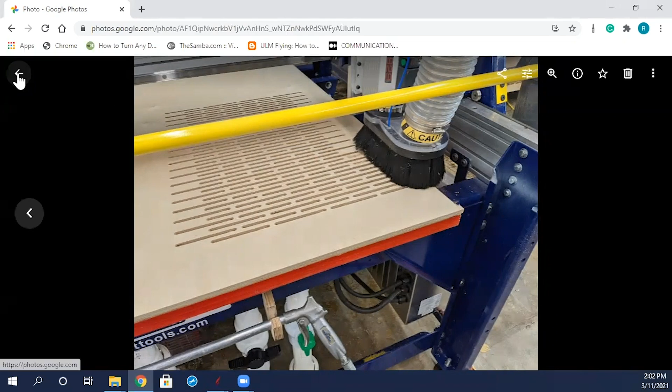I did cut a piece this morning. Here is an image of it being cut. And then just wanted to show this video here of what it is like and how flexible it really becomes. So let's get started and learn how to design and make a desk.

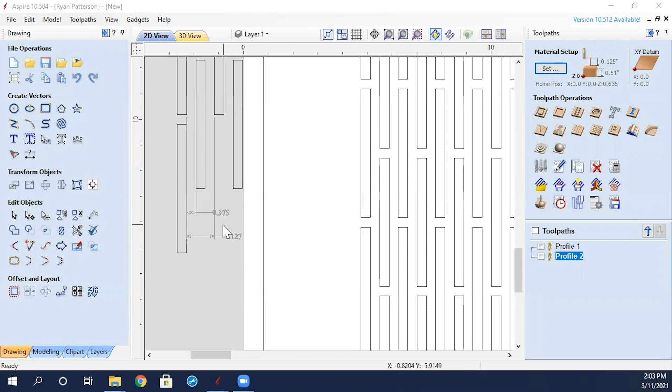So what we see on the screen now is what we are going to need to have to make this flexible. This is the cut file or the design from the video that I just showed. And we have kind of this pattern here of what I use to be able to duplicate this across the board. So the first thing that I'm going to do to start off with in designing a desk is kind of draw maybe a front view of what I want it to look like. So I'm just going to go into Aspire, but VCarve Pro works just the same way. I just happen to not have VCarve Pro installed on this computer.

So I'm going to create a new file. The material is 96 by 48 and the thickness is 1/2 inch. I have not tried this at a 3/4. I would imagine it would work almost as well, but you might have to make the slots a little bit longer and maybe a little closer together. It is a single-sided job, Z zero to the machine bed. So I'll say OK to that.

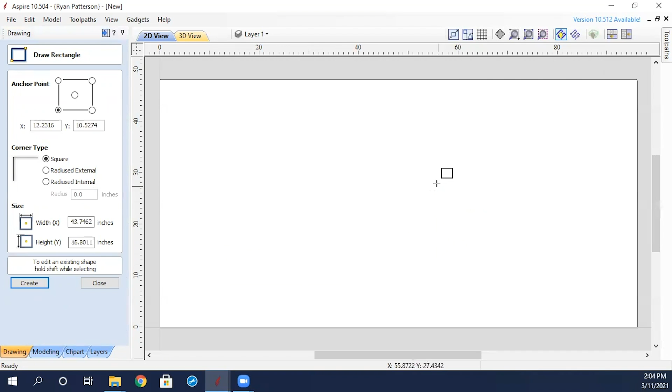So to create the profile, just going to draw out a rectangle. And probably several different ways of going about this. And I'm actually going to just use my measuring tape here to measure off about what I have. So I have 54 inches across the width of the desk. So I'm going to make that X54. And I believe the height is like 29 inches. So we will go with a rectangle of 54 by 29. So this is kind of the front view of the desk.

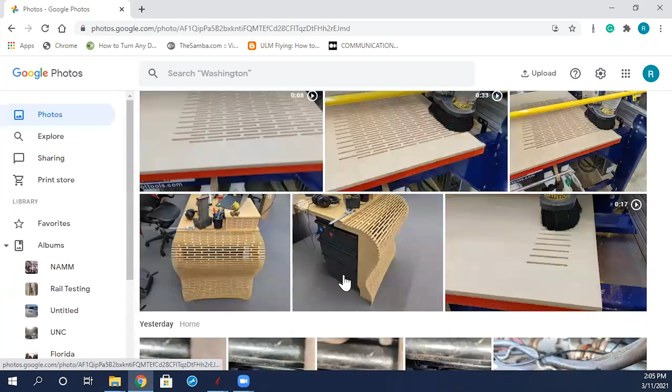What I want to be able to do is create a curved feature off on the side as we see. Get back into the photos. So creating this curved shape here, just going to use some node editing to create this pattern and shape. So clicking N for node editing. And I don't need this bottom line, so I'm going to right click and delete that span.

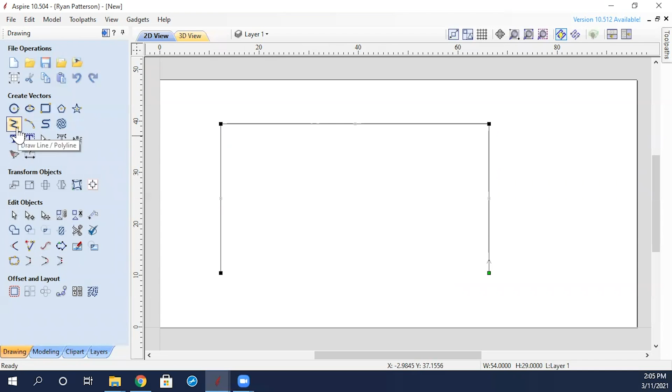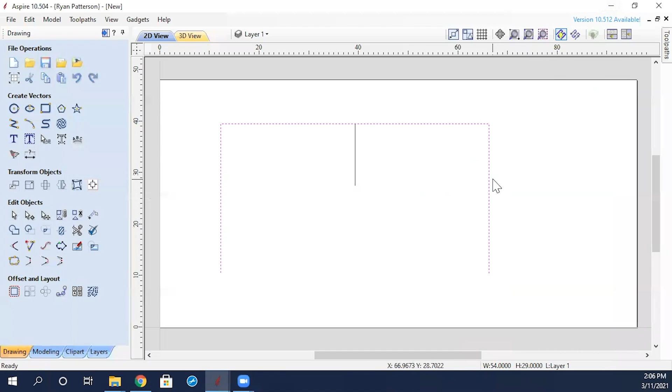So what we're doing is creating an arc or a flowing pattern like we have on the end of this desk. And this is what we are going to be reproducing. So going into node editing, and let's just start off with moving this point out, and then move another point in. We could now go and use smoothing to smooth this out. And we want to have this to be a kind of a perfect transition from flat to around.

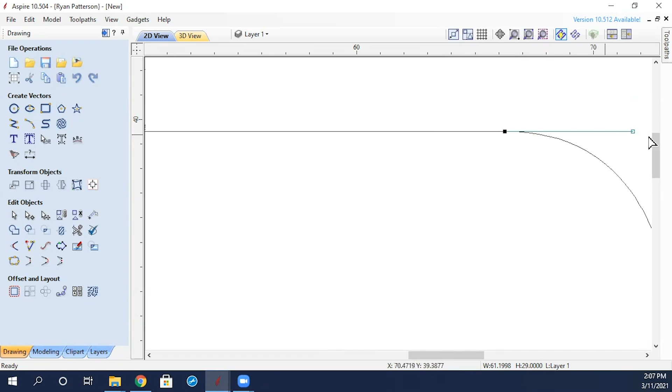So what we are going to use is the alignment features within node editing. Just going to bring this up so we can see what's going to happen. This line we need to have to be perfectly parallel with our horizontal line. And I've just discovered a new feature that I have not really paid too much attention to. It has the smart snapping to where it is automatically snapping to that horizontal line. So that's actually very useful.

What we once had to do was select one, hold the shift key to select the other. And if you want to have those aligned in the Y direction, just type in the letter Y, moves that. But as you see, it moved the wrong one. And that is because I selected this one first, then this one. Doing it in the opposite order is going to shift that down.

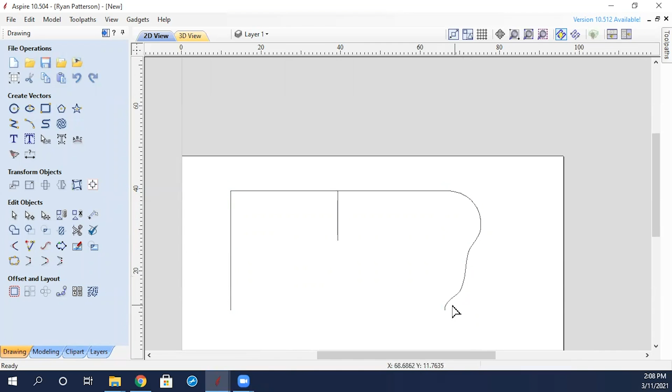So really just kind of creating some sort of a flowing pattern. I think I need maybe another node. A shape similar to that. So again, this is the midpoint. I'm just going to go ahead and trim right now just to know that we only have half of that.

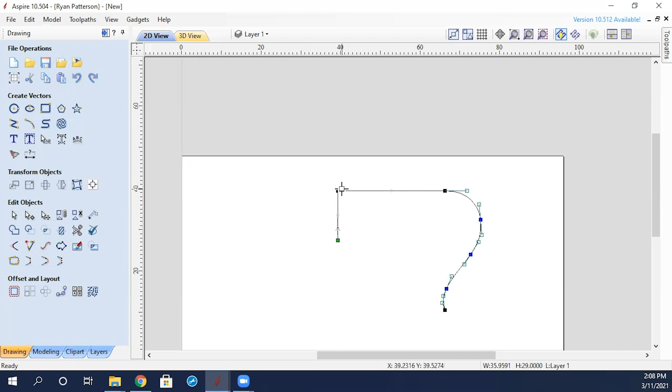Now, one thing that happens when you do a trim, I really don't want this midpoint line to be joined, but a trim automatically joined that. So just going to right click on that node and say cut vector. That now separates those two.

Now using the offset tool, I'm going to offset outward maybe half of an inch, but let's mirror that first. So selecting the object, using the mirror function, selecting our other line here, and going to flip about the line. No longer need that midpoint, and I'm going to select both objects.

It's kind of strange that a trim automatically joins, but a mirror and other functions don't. But anyway, we'll go ahead and select both of those, and typing the letter J or the join icon and selecting to join. We now have the basic shape of what this desk is going to have.

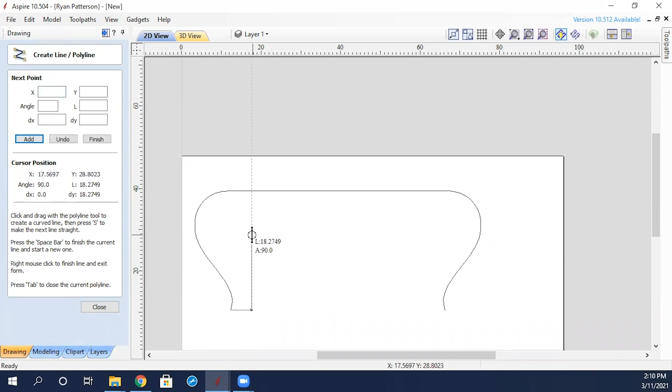The way I created this was just overlapped the material. So it is 1/2 inch plywood. The desk part itself is a total of 1 inch thick because this is kind of overlapped on one another. I also created some ends on it to attach it to.

Again, I should have really paid attention to what that line was. That's okay. This is a lot of just kind of design on the fly here. So you're seeing my whole design process, failures and all. So a lot of times when you're designing a part similar to this, there is a lot of just going to do it, I didn't like that, undo it, recreate it, and you might do something and realize there's a better way of doing it. So this is what I just discovered in that process.

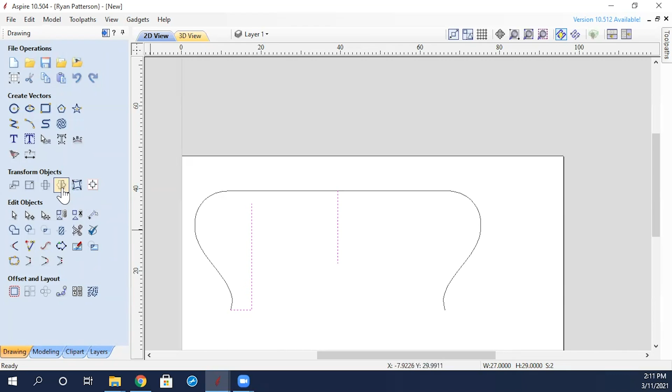So again, I want to be able to duplicate this onto the right side now. So again, I selected what I want to mirror first, doing the mirror and flip about line, making sure I have that create copy selected. And then I will connect that together with a line.

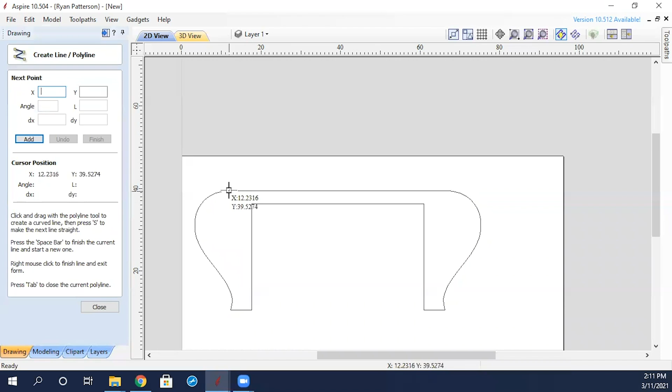And just a way to verify that everything is going to fit right. And then also we're going to measure along these arcs to see what we really need it to be. So I'm just going to offset outward to the right. I know it's to the right because here is the start point, looking down the line to the right side. I'm going to offset that out to be 0.5.

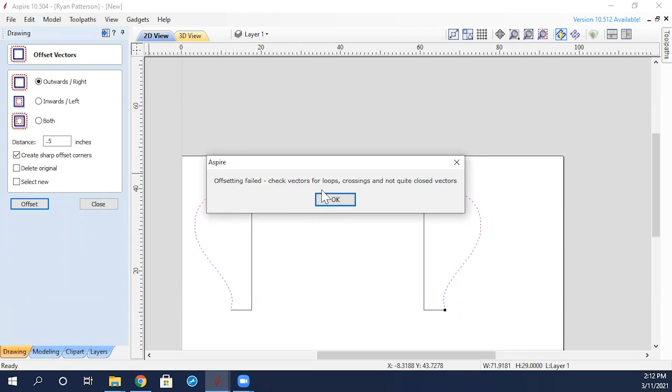Right, so that is a good find. Let's figure out what might be going on there. Maybe somebody else will help me out. So I'm going to go into node editing and just kind of look around to see what might be the holdup that it did not like. I'm not quite sure. So try it one more time. It doesn't work the first time, it's certainly going to work the second time, right? Well, no. But that is just fine.

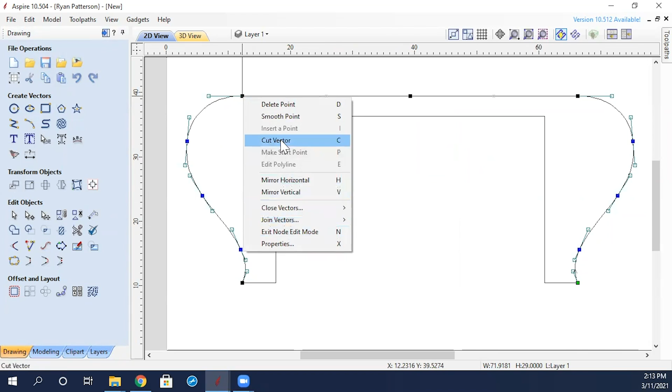I'm going to separate it. We have to separate this anyway. So I'm going to node edit and separate it right there at that point by cutting. And see if that allows us to offset. And it does. So that is good. That is the one side.

And this side, going to be there. I really can't remember what I did to offset it. Now I see what I did. So this one is actually offset to the inside, or, again, it's still to the right because there is my start point.

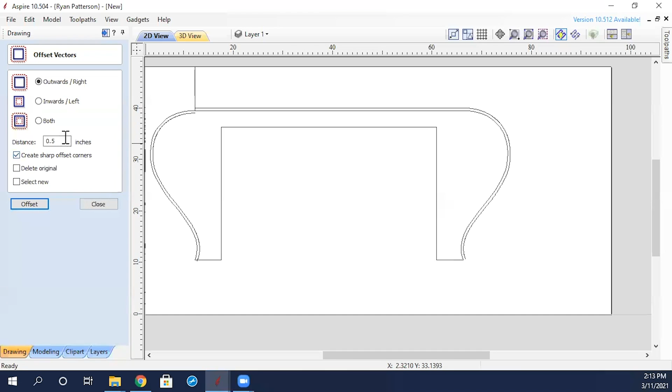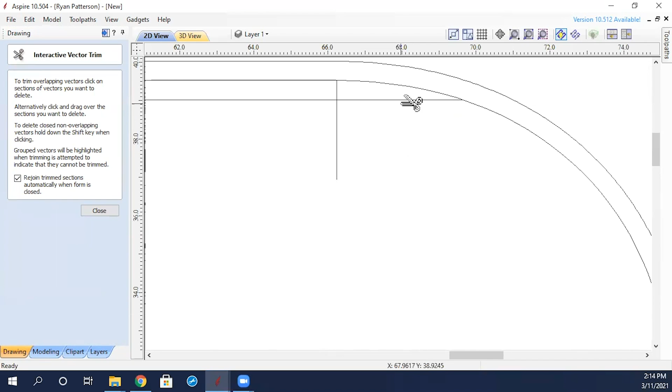And just going to continue that line straight across to the opposite side. And again, just using the endpoint, snap down, and we were really going to get into these scissors later. So that is kind of the basic shape of the desk.

And now our goal is to be able to measure the linear distance from the endpoint of this line to the point that we have down here. And we also need to know the distance from the point right around in here to the bottom point here so that we could get the stop point of the pattern that allows it to flex.

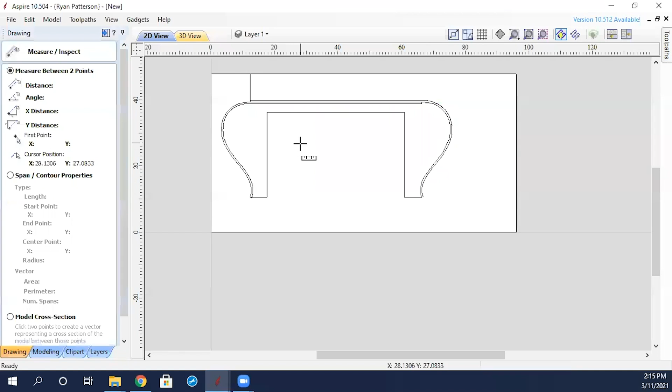If you are not familiar, there is a way to measure a distance. So I'm just going to measure from one to the other, and that's 54 inches there. And should have had some paper. So yes, sometimes math is involved. So we're going to go 54 inches.

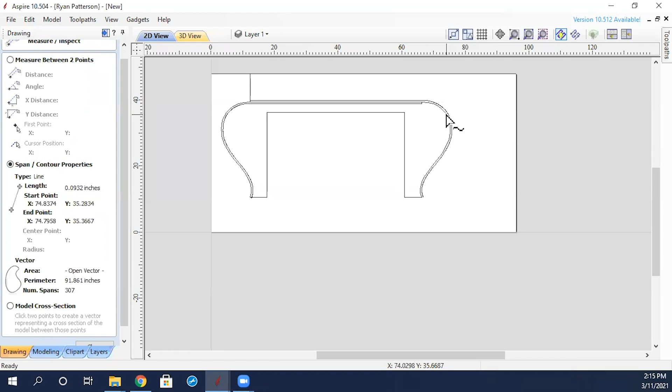Now, the other thing that we need to do is measure along these arcs. But doing this as a straight line doesn't quite work because we're not getting the arc length. There is another option here that is able to measure along a contour. So selecting the contour shape that we want, and basically we're going to just need to start adding up these numbers. So there's another 12.5.

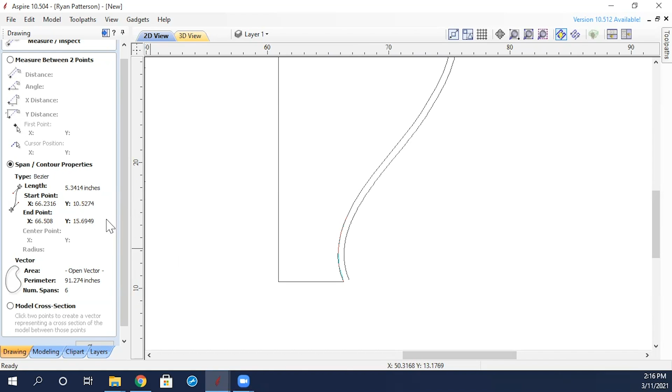Another 9, and I'm just going to do some rounding. It doesn't have to be 100% perfect here. 10 inches. And you'll see that it is kind of turning red on that line. It's really kind of hard to see, but it's a red teal colored line that's going through here. And that final one is 5. 25, 27, 38 inches total that we have from top to the bottom.

So now with that all in mind, we're ready to start laying out our flat sheet goods to be able to create this. So I'm just going to select this, move it up out of the way, and going to go with a rectangle. And the total depth of my desk is, well, it's 54 wide, and we're 30 inches deep. And then that rectangle is representing the top side of the desk.

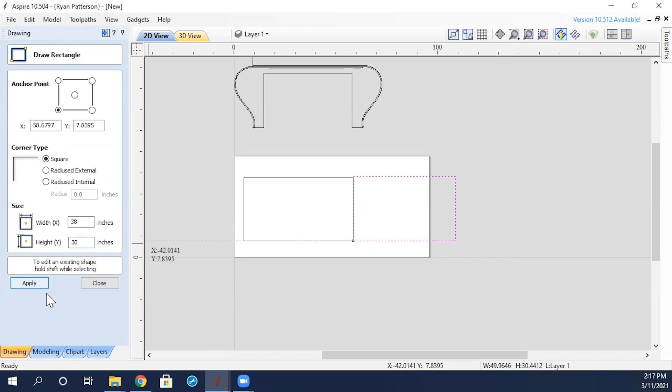The leg part is going to be 38, and then the height, which is really the depth, is going to be 30. And I really hope that the layout with all of that added together is still less than 96 inches, which is good. So now what we need to do on this section of the blank, we need to create a pattern of kerfs or through cuts that will allow this to flex. And again, coming back to that video of what we want to see here, and this is what we're going to be creating.

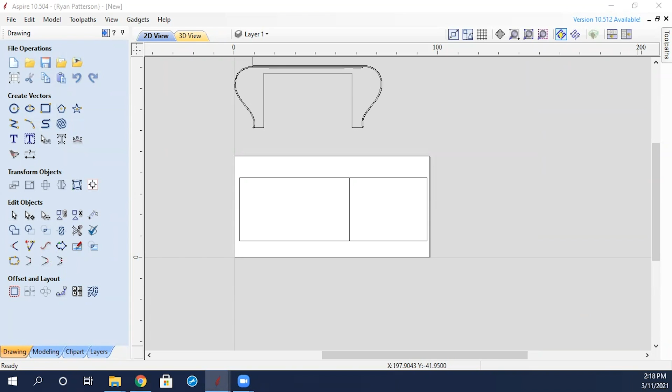All right, so I think I may have just clicked a button that prevented me from sharing my screen. So hopefully that is not the case and everybody is still here with us. Yeah. All right.

So now to create this pattern, I have this pattern here, and this is what we're going to be creating. I started off with creating just a small pattern by manually creating it, getting some measurements, and then we're going to use the array copy to be able to duplicate this pattern much more easily.

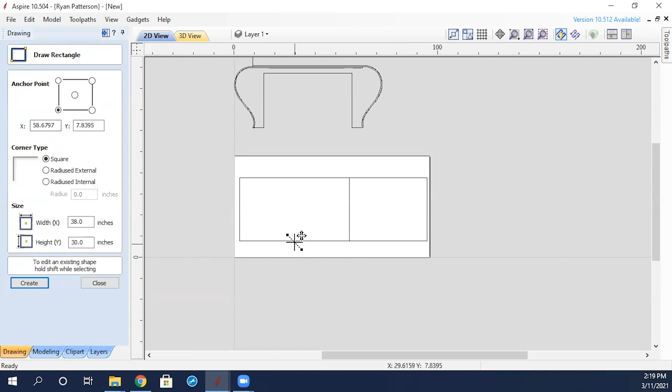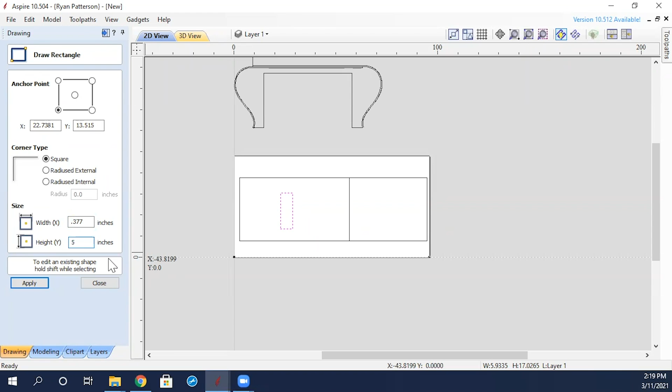So starting off with a rectangle, and I am going to be cutting this out with a 3/8 wide bit. So the width of this rectangle needs to be at least 3/8 of an inch. And I did create that to be 0.377. And then the height in the Y direction is, I made it 5 inches. Now you could explore different settings and different variations of that to see the pattern. And we'll look a little bit at distorting later in the video to show how we could possibly distort. We'll see how it works.

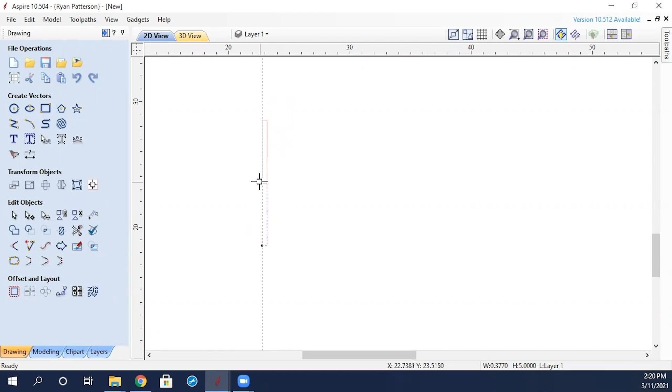So with that one rectangle done, I'm going to manually create this pattern. So I'm using the snaps to move or copy. I held the control key down as I snapped from this lower left corner to the upper left. That made a duplicate copy because I had the control key held down. Then I'm going to choose to transform, move that object, and I'm going to move it in the Y direction by 3/8 of an inch. And to do that, I'm just going to use the relative distance and move it up 3/8 of an inch.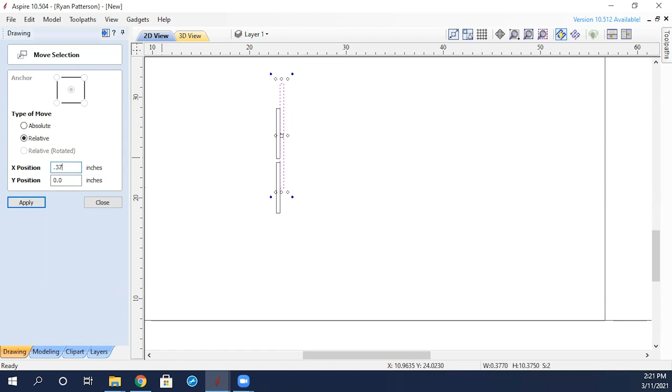Now we need to create basically the same pattern. So I'm going to hold the control down, but midpoint to midpoint here. And going to move it in the X direction by 3/8 of an inch. So I did that, but that's not quite right. And I'm going to double check that because the midpoint of this gap here should be at the midpoint of that line. And it really is not. So we did have that to be.

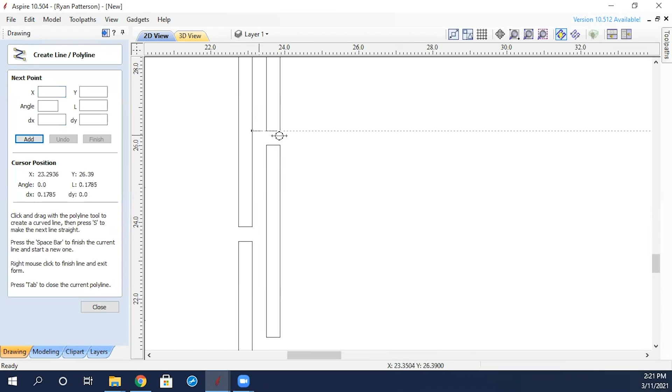So this gap is 3/8 of an inch. I really need to move and shift these two up by half of that gap, which is going to be 3/16, which is 0.1875. Now, if you did not know it's 0.1875, you could go 3/16 and then it equals, and that equates that for you.

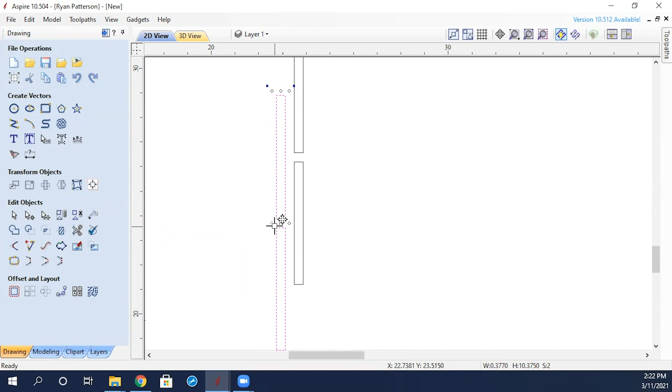I should not have moved it in the X, should have done it in the Y. So now that is kind of the basic pattern that we want to be able to reproduce and copy. So we're just going to create the same thing of this one, just to kind of complete a full section of this pattern.

And I do things different every time I do something. Again, I forgot to hold the control down. That's selected, going to shift over. Now, once you really start getting into it and knowing this, these steps here aren't really fully necessary. This is just helping me make math a little bit easier.

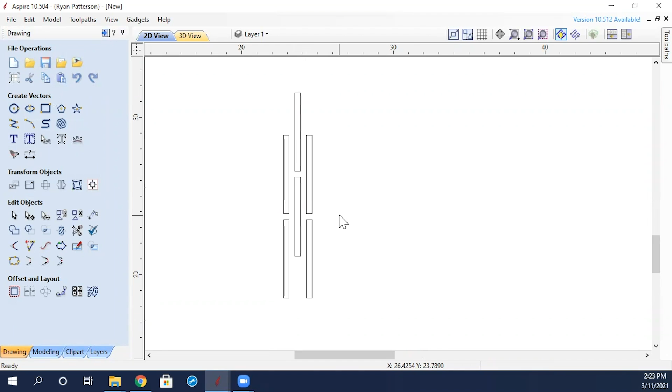So with those patterns created, just going to use the dimensioning tool to kind of record the gap between what we have here, between this point and this point. And we already know the others, which is 0.377 in the width and then 3/8 in the height there.

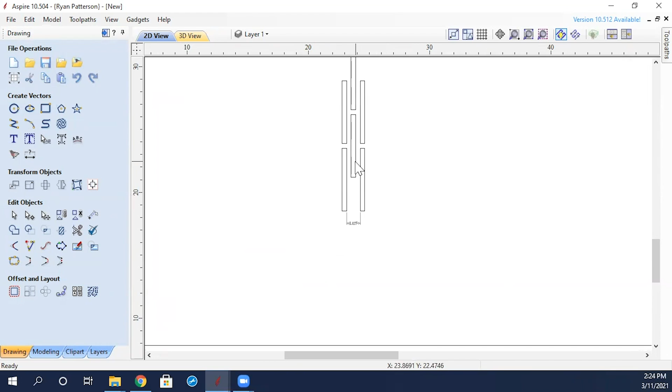So the reason for all of that work was just to get that number of 1.127, and also to get this spacing pretty much kind of right. So we're going to just bring that over here. Not worried about exact placement yet, because we'll use our alignment tools when we completely fill this out.

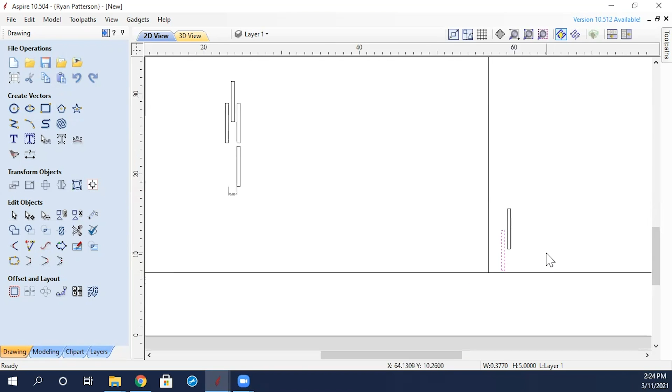But I'm going to be able to use our array copy. And I'm going to do it twice, one for this one and then once for this pattern.

Selecting that one first, use our array copy. How many of them do we want in the Y direction? I'm going to say maybe 6 of them are going to fit in the Y, and maybe 20 in the X. And we can go copy.

No, we definitely need more than that in the X. So let's bump that up to... oh, we don't. So bring that back down to 20. The gap is not 0.377. We want that gap to be that 1.127.

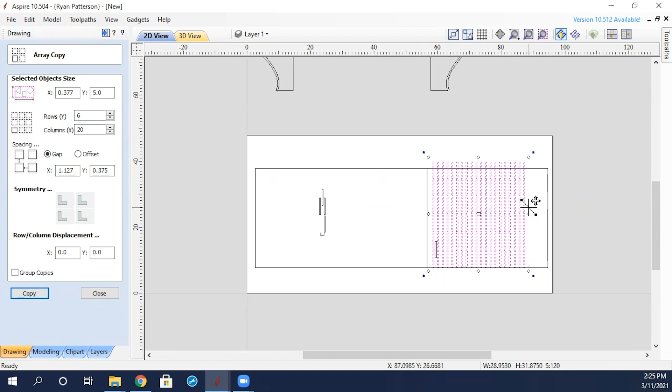Could bring it down a little bit more, but I do have on the bottom, I do have a flat spot down there. So let's just bring that up another, add another 3 more to it.

Going to run the same on this pattern right here. I am going to add 1.

I need to create and move this pattern to the bottom side to get it to be offset on both sides, with that selected.

And again, this is kind of me doing this on the fly. If I were to do multiples of it, I would probably rethink how I'm doing this and do it completely different than I just did it, 20 minutes ago when I cut that.

So I'm going to move this down by 3/8 of an inch. I'm still in relative mode, so I'm going to move that to a minus 0.375 and then create that.

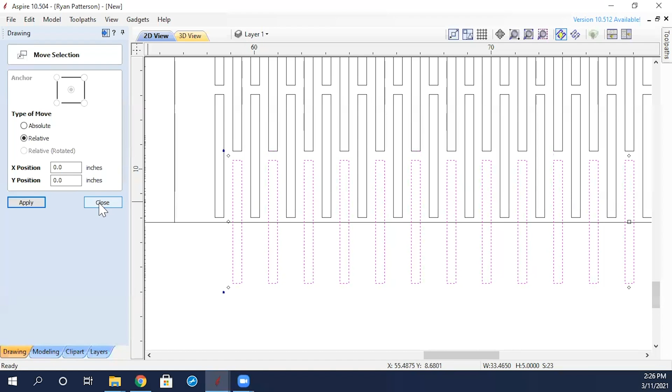Don't need any of that. And I'm going to go node edit. I still want to have this line over there, but I don't want this top and bottom line span. Or maybe I did. I can always put it back.

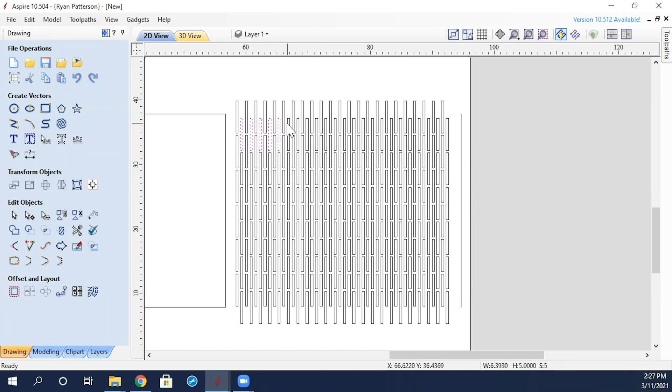All of these individual points right here, we need to extend those out so we could trim those off. So going node edit, and this is a nice feature of the newer version of Aspire and VCarve Pro that allows node editing of multiple items.

And we're going to see another fun feature of the new VCarve, if you haven't figured it out yet. It is the feature of trimming. Okay, I'm putting those lines back that I've already deleted.

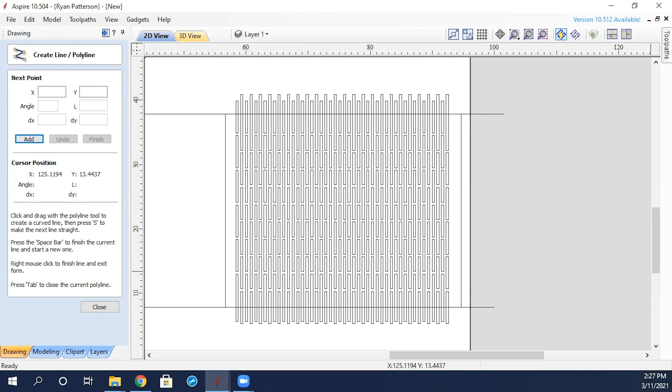And the scissor tool that we need to trim all of this off there. And the new feature, if you hold down and just move your mouse across there, they all get trimmed off. There we go. So again, deleting that line.

What we need to be able to create is a cutting pattern that is going to cut around the outside of all of these. And this is where your eyes kind of start getting a little bit lost and confused, at least for me. So we really want to have a line like this, and then we need a connecting line every other, or have an opening every other spot there.

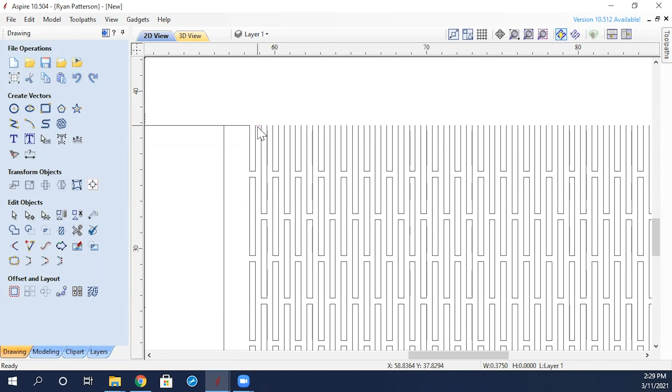I am going to not have this as a square, even though the sample piece that I cut, I set as a square. I want to have this as an arc, a little bit smoother transition. I didn't even do that with the desk. I thought I did. But anyway, going to go node edit and convert that to an arc and bring that up to the top. I don't want to have that joined just yet because I want to be able to duplicate this down the length of what we have here to be able to finish connecting those dots.

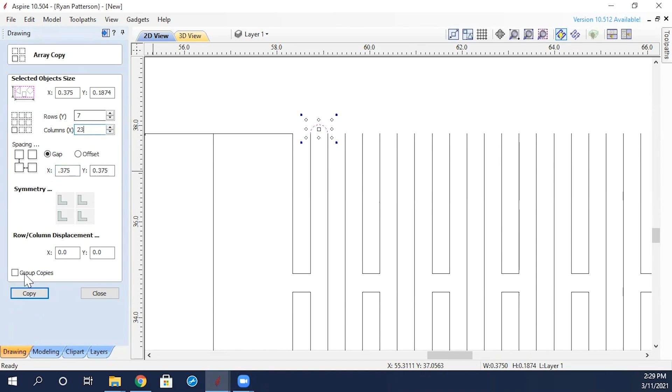With that selected, running the array copy, the gap that we want to have is going to be 3/8 of an inch. It might be .377, but 3/8 of an inch. And let's just do a copy. Yep, it's 3/8 of an inch. That's good. I don't want any in the Y, so the magical keystrokes, Control Z, just undoes what we did.

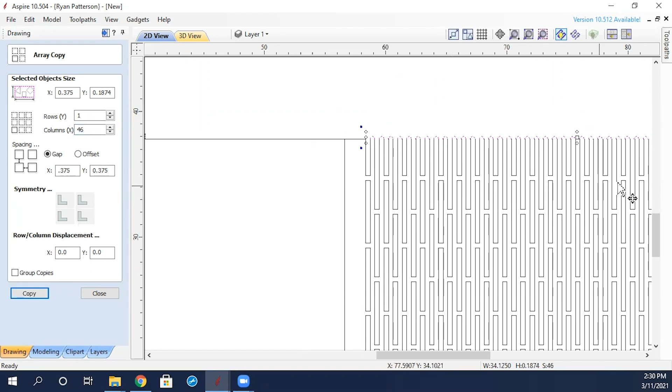So I'm going to reset the Y down to only one of them in the Y direction. I'm going to double the X. And it is not, you see, we have kind of an accumulation of error that happened there. So it is that 0.377 that we needed. So again, Control Z, 0.377. That's what I wanted.

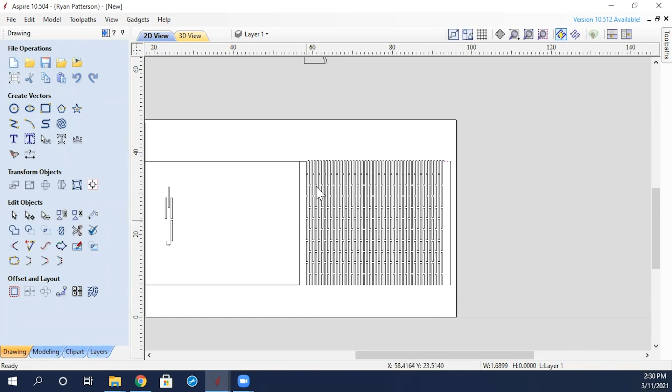And just make that final connection right there. Now, there's a couple ways that we could create the opposite side here. We could mirror what we created on the top, or just do a duplication of what we just did on the top side. I don't think either is right or wrong. It just all depends on what your mind is up to that day. So I am going to do it the exact same way.

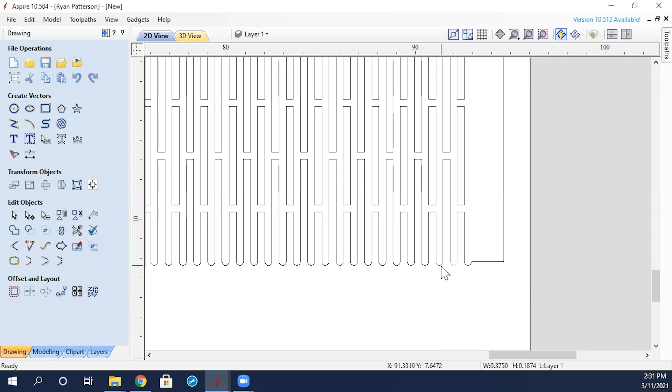All right, now with that all complete, we are quite opened up. So even though everything looks like it's closed and good shapes, we are definitely not. We are completely open. We need to trim some things away. Let's get rid of this line right there. That may have automatically joined some. It did not.

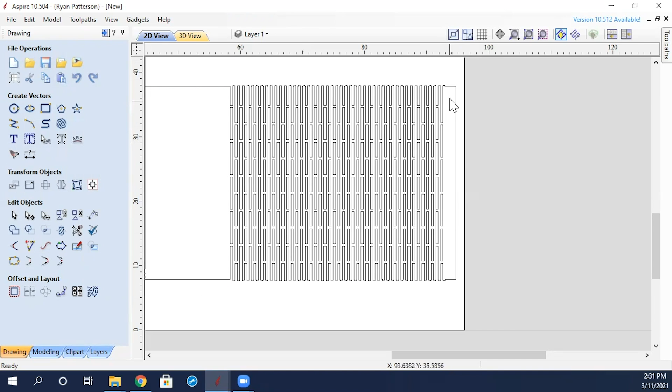So let's go ahead and do just, let's go ahead and Control A, does a select all. We don't have a lot on screen, but that is okay. It's going to unselect what we do not want to have joined. Clicking join with the letter J. And now we should have one continuous outline that it is going to kind of cut all the way around there, and then we'll cut in between all of those vectors there.

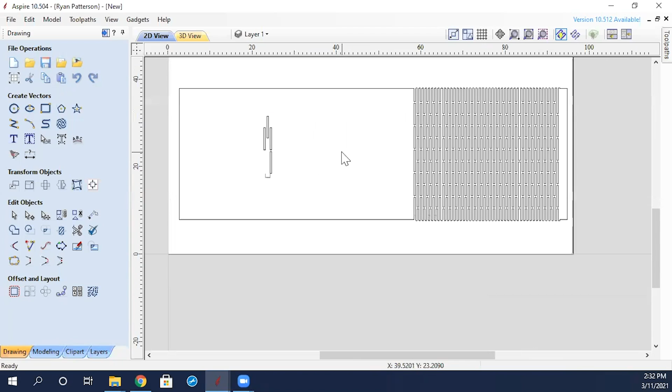So once this is created, we're ready to, we just need another sheet for the kind of the profile or the mold of the design. I want to have this basic shape down here. So I'm going to clean this up just a little bit.

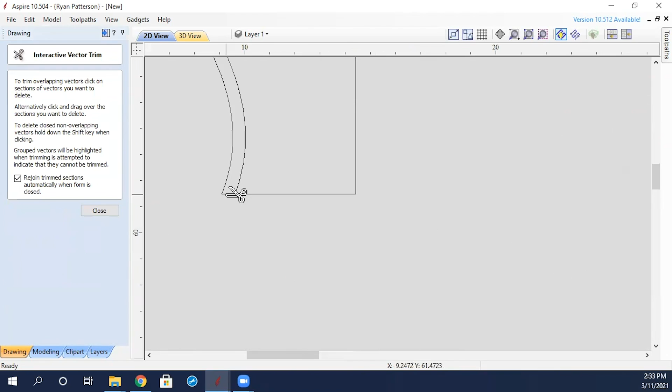This side, it really doesn't matter. We're going to get up around the top. And just trimming away the parts that I know I do not want. All right, so that is going to be it, and it did not automatically join that. So make sure that we always stay joined and not get too far ahead onto another product section when we don't have it joined.

All right, so yes, we have this little notch here, but that is going to fit just perfectly because remember, we are going to put this side down on top of that. The bendy side is going to flex and bend around here, and then we'll put another duplicate exact copy of what we have here, layer it on top, and come around the bottom side. Again, let's just see if I have the photo still up. So you can see how it's doubled up and as it goes across there.

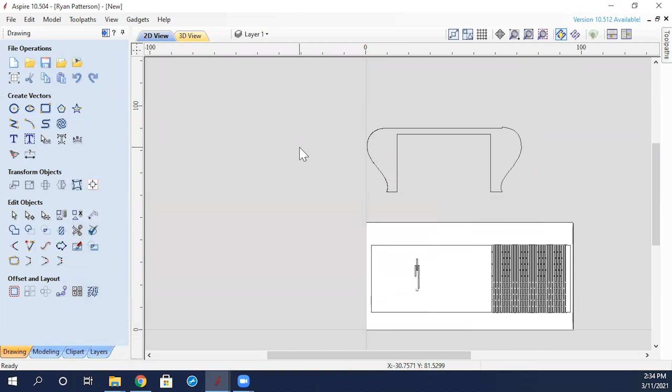So we're ready to really lay this out on our material now. A couple ways that we could do this. I could create a nesting of this, which I might do, but I'm not going to completely fully nest because we'll try it both ways. I'm not certain if the nesting will automatically do very well with this part here. I think the nesting is going to tell us that we have need a total of 4 sheets, where I think we could get it 3. But we'll see what happens.

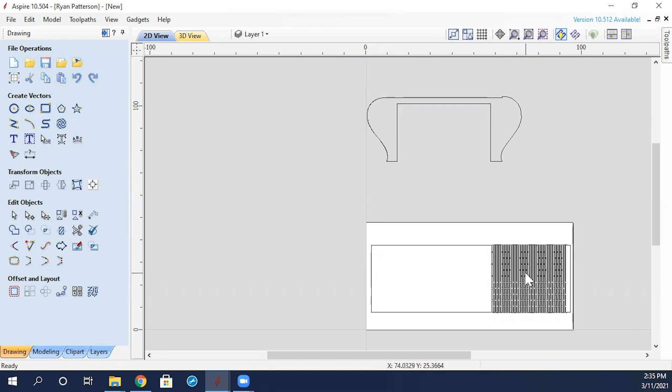All right, so I'm going to do a sweep select of everything that I want to have nested. Before I do that, we really do have to select them individually because I need to say that I want 2 copies of each of these.

Apply. So that is giving us that number 2 on that one, and then the number 2 there, that's saying that we want 2 copies of each of those, so I'm not drawing them twice. So now we can see that I'm going to get 2 of the supports and 2 of the desk bendy side of it. So with the quantities selected, I am going to come back up here to start filling in from top to bottom. The tool diameter is going to be 3/8 of an inch.

That's what I'm going to choose to cut this out with. I do want to have at least 1/8 of an inch in between each part. After the 3/8 goes through, it's going to have at least 1/8 of an inch material to remove off, so that will give us a total kerf cut of a 1/2 inch total between each part. The border gap, let's bring that down to 1/8 or 1/4 of an inch.

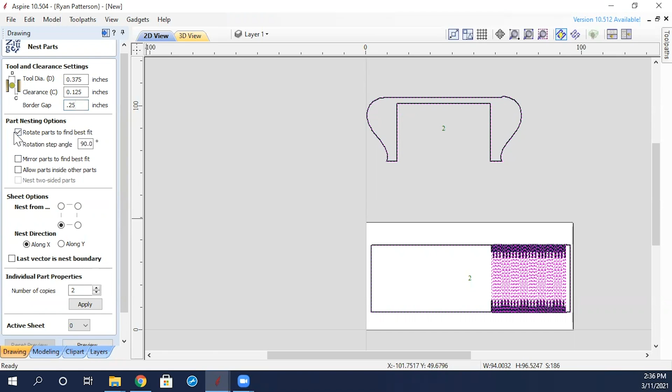That is how close are these parts going to allow to be nested to the edge of the sheet. Do I want to allow rotation? Yes, we want to allow rotation. There's no point in saying any greater than 90 degrees. Really just say 180, because there's no way that's going to fit any other way but 90 or 180.

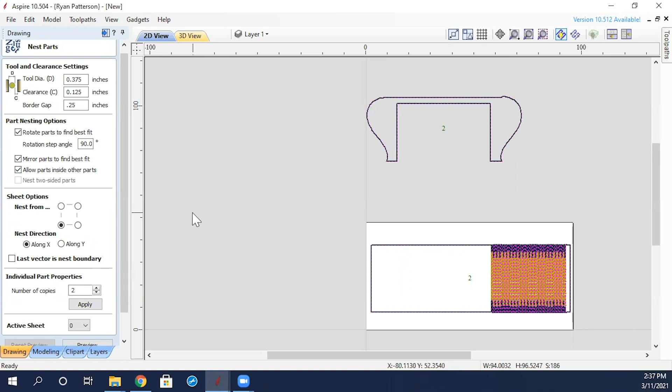Mirror parts to find best fit. Now, really, again, doesn't matter since this is already a mirrored part, but why not? Allow parts to fit inside of one another - we do not want that, because there's just no part big enough to fit inside of any of those small parts.

I don't ever really worry about any of this. The last vector is nest boundary, that's if you have like a big set of material and you want to nest all these parts within a boundary, but our boundary is the material set. So we are good to go to preview.

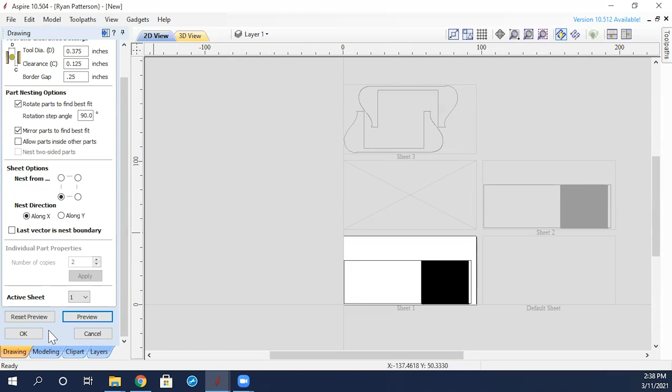Oh, well, it did a good job. I did not know it was going to nest those as well as it did. I thought it was going to try to put each one on its own sheet. So not too bad. I am going to come up on sheet number 3 and modify the layout just a little bit. But before we do that, we'll go ahead and say okay and accept this nesting.

And to view each of the sheets, we have sheet 1, sheet 2, and sheet 3. I really should have just told it to do one of these parts, because I would have just cut that file twice. I'm not even going to bother toolpathing sheet number 2.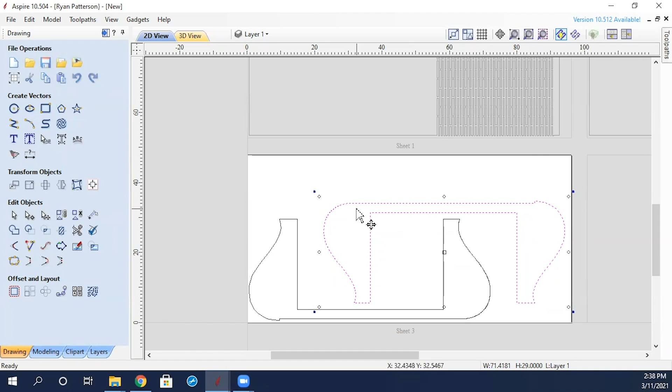So I'm just going to rearrange this a little bit by bringing this down. The only reason why I'm doing that is to have a more usable leftover waste piece to use for another project, a little bit more material usage that way rather than eating up - well, you could do whatever you'd like to do with that. I just feel that it fits better.

Anyway, we are ready to create the toolpathing for this. And since we're on sheet number 3, let's just go ahead and set the toolpathing for these parts here. I'll show you the video where there's a little bit of a blooper in it - we'll see that at the end, a little bit of a fail on my part, and it was all about hold down and how they were cutting when I cut that sample.

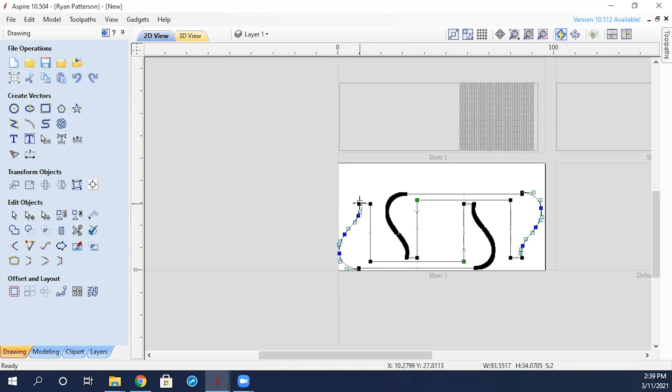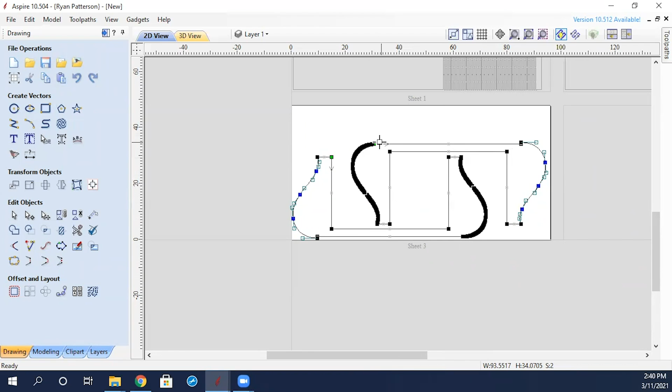So I'm just going to come in here and replace the start points. So that is right clicking and selecting to make start point, or hitting the letter P for the point to start. We are going to cut in a conventional direction, so that means it's going to start right here and work its way from right to left around this part in the conventional direction and finish up here. So with that start points selected, I want to select them in the order that I want to have them cut.

So I don't want to cut this one first, just because of the material hold down and the vacuum and everything. If you've seen our video on nesting and optimizing the strategies of cutting, that's kind of what I did there. We have that video out there already.

So with that selected, and I did select those in the order that I want to cut, but that doesn't mean that's just what's going to happen. We have to set and tell it that that's how we want to have it cut. It's probably how I have mine set by default, but we will view that setting. So we have the start depth to be 0, which is typically 0.

Settings that you kind of have to change. There's a lot of arguments I see on forums: I just changed that, the start depth. Well, the start depth has very specific uses, but the only use for a start depth is if you've already removed material. People like to try to control V-carving with that. That's not what you do. That's not how to control the depth of a V-carving.

So we are going to cut 1/2 inch deep, and actually a little bit more than 1/2 inch deep, the 10 thousandths, which is enough to go through the material and down into the spoil board. In fact, when I was cutting our sample piece that I just cut, it did a couple slots, and I saw that I wasn't cutting deep enough. And I'll explain that when we watch the video and how I got around fixing that.

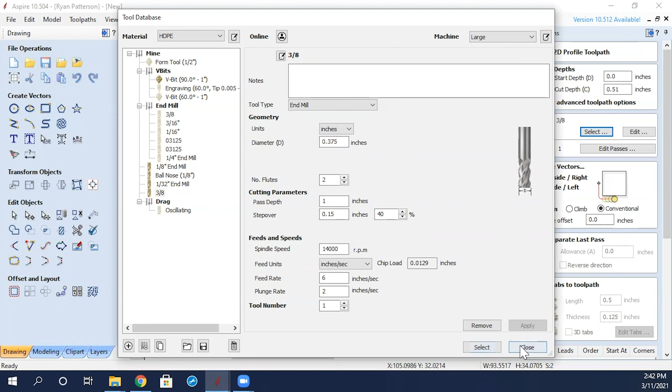So the cutter is the 3/8 cutter. It's typical tool database being set to select the cutter. I'm going to cut on the outside in the conventional direction. I do not want to add any tabs. The vacuum, I think, is going to be strong enough to hold this in place.

I did create and use a smooth ramp in over a distance of 1 inch. That helps keep the tool in constant motion, and that is going to prevent the heat from building up on that cutter, and that is going to increase the life of your cutter and less chances of breaking a bit when you do a ramp in this way.

So the start at here, this is where we have optimized start points. That is not what I want. I want to keep the start points in their current position. So I want it to force its start point to where I've asked it to start. And then the order, so I don't want any of these checked. I want it to be the vector selection order. That means that I selected one, then the second one, that's the order that they're going to get cut.

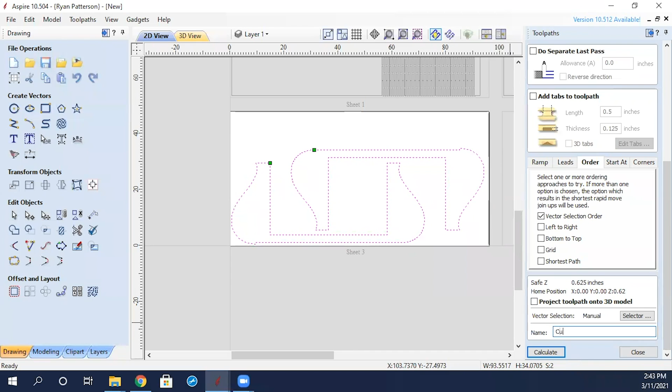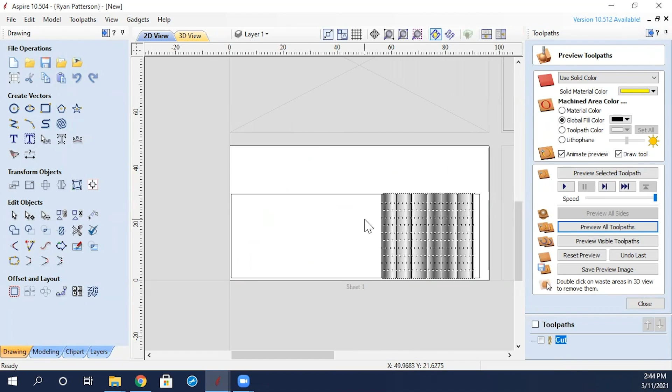We'll give that a name of cut, then OK. So that was easy enough. That is done. Nothing more needs to be done with that. The other is double clicking on sheet number 1. And there's a couple different toolpaths that we're going to create here. We really could do it all in just one by doing a profile just the same way, selecting the entire object and clicking profile toolpath and calculating.

I didn't pay too much attention to all those settings because I know that Aspire keeps the default settings, but there's a couple that they do not keep. So let's view that again. One is I do want to have those set to be ramping, and the corners start at and the order does remain the same. All right, a lot happening in there, a lot of red lines. But let's just go ahead and preview what that visible toolpath looks like. And that's really about it.

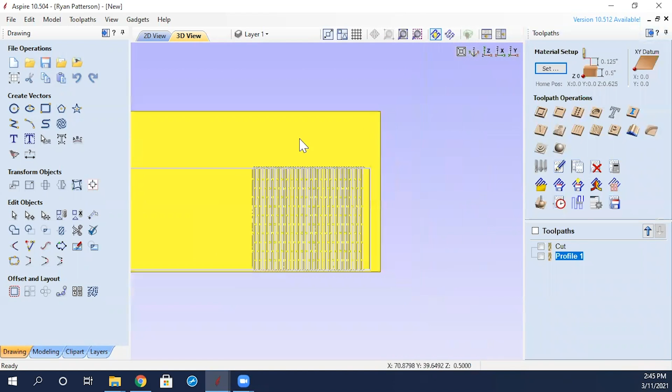One thing: when you have multiple sheets, it sometimes gets confusing on what toolpaths are done over here. So there are groupings that we're able to do, and it's been a while since I've actually done that. So one of these icons, maybe it's not an icon at all. Right click, empty group. We could rename. I'm going to call this sheet 3. Go to another empty group, rename that one. Oop.

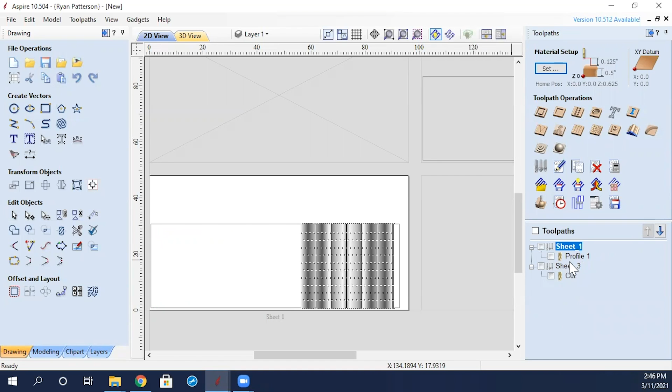So we've just kind of moved those around. So now we have a group for sheet 1 toolpaths, and then a grouping for sheet number 3. In this case, it really didn't have to do the groups because we only have these 2 toolpaths. And I could have just as easily named this profile 1 sheet 1. Rename that to cut, because you really shouldn't leave them as default settings there. But anyway, this is basically it.

This is going to give us, once we get this cut out... Now, the way I created the desk was just kind of precariously balance these as I placed this on top and secured it with just a brad nail into the first layer. And then the second layer that I put on top of that, I just glued that down with a couple drywall screws, wood screws from the bottom up into this upper section there. And again, the video of the flexibility.

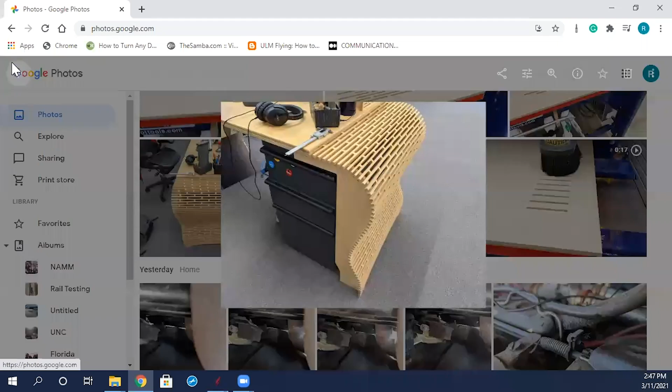It's really quite amazing in how easily that just flexes and moves around. Could get a very tight radius in there. I don't know, it'd be interesting to see what you all are able to come up with as far as projects.

So that was just a 1/2 inch economy line plywood. It is a cabinet grade plywood. I don't know if it's still the Chinese plywood, but it is not the Baltic birch. Baltic birch is a much better product to use, but then again, it's more expensive as well. So it's just 1/2 inch plywood.

So let's see if we can't see my blooper to see if I actually caught it. I kind of knew that it was going to happen. So I took a video of it just to see how bad it was going to happen. So you can see this is where it is, cutting it out and going around the pattern. And as soon as it first started cutting this, I realized I made a mistake in what I did. It started right here in the lower left corner of cutting right there.

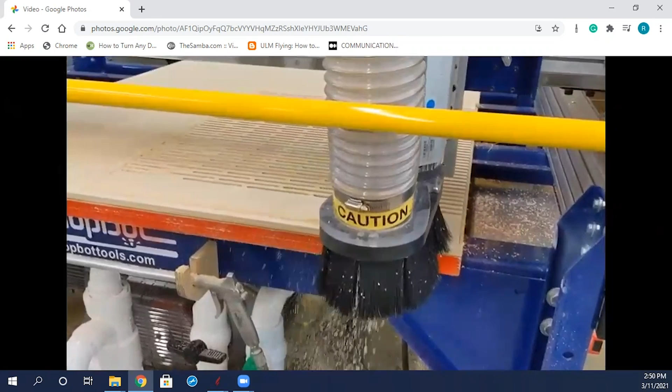But you will see that I kind of got lucky, but you will see that it does shift and give way a little bit right here at the end as it comes around right about this section here. When it gets there, you'll see that this whole board kind of shifts and moves on the table. So not too terrible, but vacuum hold down or hold down of any sorts is important.

I could have prevented all of that just by moving the start point to be this upper left part of the final cut. And that is, I would have turned on another vacuum zone off to the left here. So as it was coming down through this part, even though we didn't have a strong hold down underneath the part itself, we still would have had a strong hold down on the left side, which would have prevented that board from moving as it did right there at the end. So pay attention to where the start points are and think about the process of how it's going to be cut, in what direction it's going to be cut.

So I hope everybody has found this useful. I didn't quite stretch it out to an hour as I normally do. So we have plenty of time for questions and discussion of, what do you guys think?

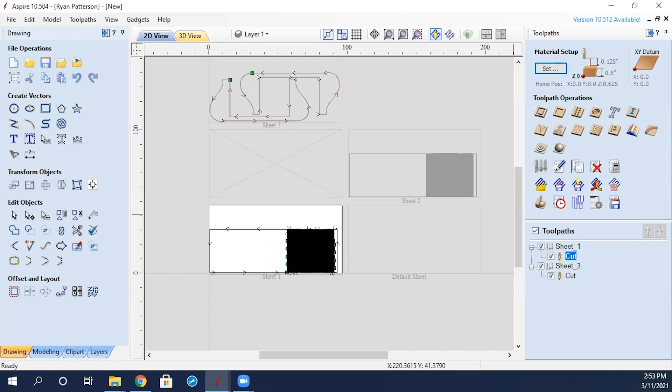Hi, Ryan. This is Kristen. I typed something in, but I think it got lost. When you were making those little lines into arcs, what was the keystroke for that, or the icon? Oh, yeah. So sorry, I didn't mention that. So if we have a line, it's going into node editing with the letter N. And if you right click over the line span, I convert it to an arc. Now the shortcut, I just did a Control Z to undo that. The shortcut for that is the letter A.

So the shortcuts for any of these are listed off to the right. So when you right click or look at menu options, kind of always look off to the right there, because there's usually a shortcut command that will help. So by hovering over top, I don't have to right click. I could just type the letter A and it converts it to an arc. Thanks. You're welcome.